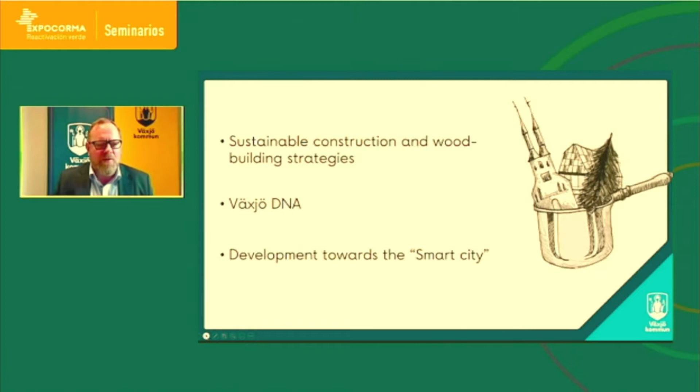So what drove us into the wood building industry and wood building construction? It's been a long process, but first of all, you need to have a market for it. So what we've seen during a long time in Sweden is that we have had a gradual change towards urbanization that led into a shortage of housing units in those areas.

And then we started thinking about how can we change and how can we fill that gap, and started seeing that those producing single family houses using wood would be a good substitute and support for those producing multi-family houses using a wood frame. So we started looking into that kind of gap and void and how to support it.

But as we did that, it became clear that we needed to gain a broader understanding of what that might entail, both from a knowledge perspective and from a market transitional perspective, since there are so many different factors influencing the development phase.

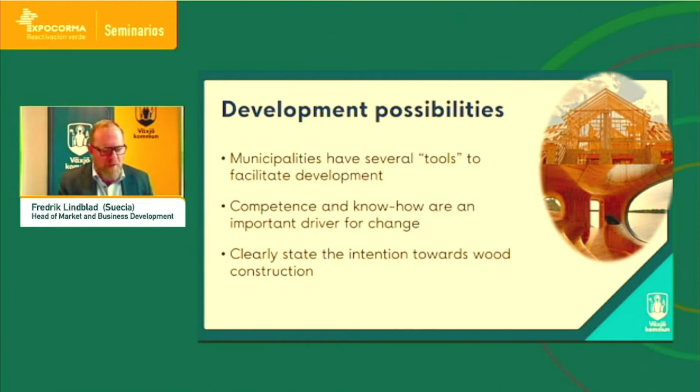So what we have to do here is clearly state our intention towards the industry. And we as Växjö municipality have done that. We started our first construction using wood frame already in '95 in this modern industrial way.

That's been followed by several different strategy documents going forward - in 2005, 2013, and 2018. That has evolved more and more, from a more technical perspective in the earlier days to a more integrated sustainability perspective in the latter version.

2018. And by doing so, we are supporting the industries. We are putting a flag in the ground saying we support wood buildings. That means that companies can start to invest in production technology because they can rely on what we do as a municipality, so they can gain economies of scale in their production process.

That means they can produce cheaper units for us as end users as well, which obviously makes it much more popular for people to live in. So those have been key factors.

And if you look at it from a greater perspective, this has also been highlighted not just by this lovely invitation from you, but also in a special edition in the New York Times during this summer, where they looked at our wood building strategy as a key development factor for wood buildings globally as well.

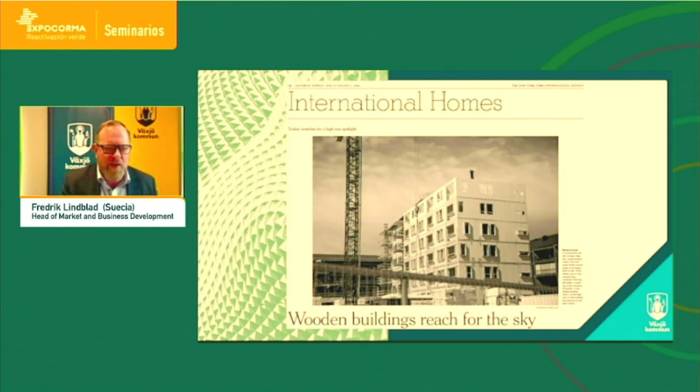Obviously, we haven't been able to do this by ourselves. This is a cooperation among a lot of different parties. And I think that's the key factor - that it needs to be open, as we want to change this from a closed innovation process to an open innovation process, where we can share our success factors as well as our failures in order to eradicate them from the process altogether.

It's also important to focus on other things than just the commercial goal. We need to have clear targets, and we need to have a clear understanding of our responsibilities and how to use the resources in a very cost efficient way.

So this has very much been a collaborative approach already from 1995 up until where we are today. In the previous slide, when I had the three different strategies, we are currently working on a new strategy, which is towards the smarter cities. So we're taking it even further, which I'm going to talk about later in the presentation. Going from traditional stick and stone kind of wood buildings to an integrated strategy, including digitalization and everything else.

As a municipality, we have had a base in our sustainability program as well, because wood buildings are seen as a sustainable construction material. So we took the UN's sustainable development goals that we all know and love, and did a version of our own that fits our part of the world, with 5 different goals and 9 different challenges.

Sorry, that was fast. Yet not everything is sustainability - let's not forget about the importance of the production process and the benefits of using wood in comparison to concrete. It's lightweight, it's easy to distribute using traditional road transport or other formats as well.

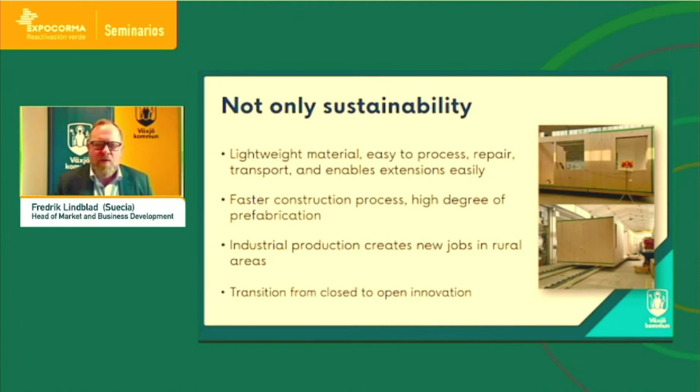It's something that we can develop the production process in a different way and use different methodology than traditional concrete structure and get better solutions, better products. So it's not just about the sustainability and those goals, it's about so many other things as well that is linked together. And what we have done here in Växjö as a key factor is use a lot of our development projects as test beds, both for the industry and for the academia as well.

So we have a full perspective of a building process from planning, procuring, production, and how the residents feel living in it, which has been quite an interesting development as such. What we found as drivers here when we looked at this research is that obviously we need to reduce the environmental impact.

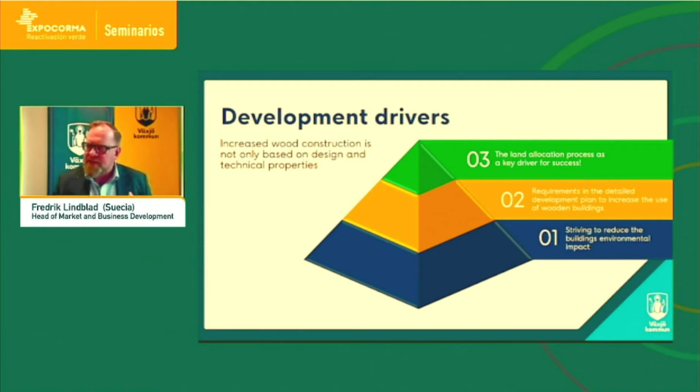We dedicated land in Växjö municipality to be used specifically for wood building, which clearly sends some signals as well. And using the land allocation process, a legislative tool we have in Sweden, we as a municipality can bypass the Public Procurement Act and sell land to developers and contractors specifying what we want them to do, like requiring wood frame technology.

If you remember the graph I showed you earlier, during 2019 we saw a dip on the concrete side and an increase on the wood frame side, up to 20%. So we are starting to see a change in favor of wood building technology and sustainable construction.

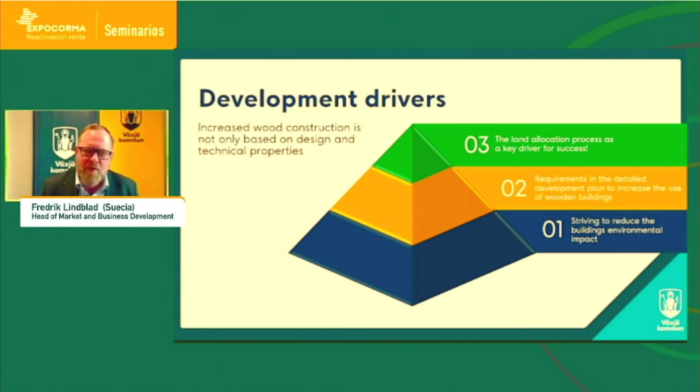I think these are some factors. As I said, it's not just about the technical side, which is easy for architects and everybody else to focus on. It's equally important to look at the strategic, softer market sides. And that's what we're doing now when we're looking forward.

We need to incorporate other factors into our wood building strategy, our sustainable construction strategy, in order to reach there. So it's not just about construction and wood building in itself now, it's about so many other factors that contribute to a sustainable society and a smarter city.

I'm part of a group in Sweden looking at how future cities would look, let's say 2050. We've started this discussion. This is obviously very early, but we are looking at robotization, digitalization, and climate change, which is going to be a big driver for us. How can we handle this? What kind of efforts do we need to meet these challenges?

For us to construct and plan our cities, but also for our inhabitants to have a life that is sustainable for the long term as well, these are some of the factors we talked about.

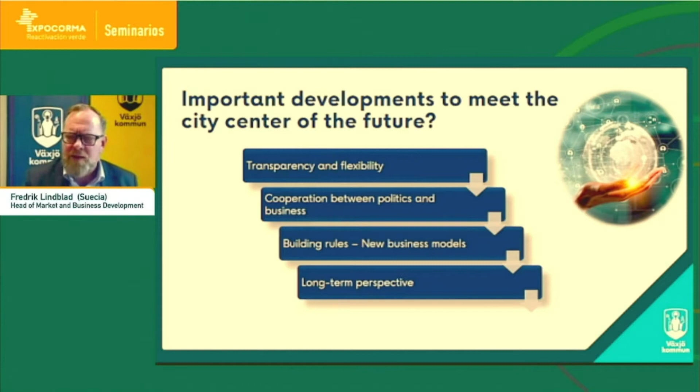Our next test bed, in comparison to what I discussed before, is called Crossways, which is our new smart city concept. It's a big area of our city trying to incorporate new solutions, looking at sustainable energy as part of it—how we can use methods to create sustainable energy and save energy locally using batteries, for example.

Or how can we change the healthcare system in a sustainable way? And more importantly, how can circularity and circular models support the development of cities, from everything from reuse of products to complete new developments?

That's the big challenge for us going forward, because this is not a complete straightforward process, as it includes a lot of different companies, not just in the building industry and building process, but elsewhere. How can we connect the city with smart ecosystems?

That means how can the inhabitants live in this sustainable city, sharing information and having information access at their fingertips, making their life easy and easier to live in a sustainable way as well. It all links together in the sustainability goals.

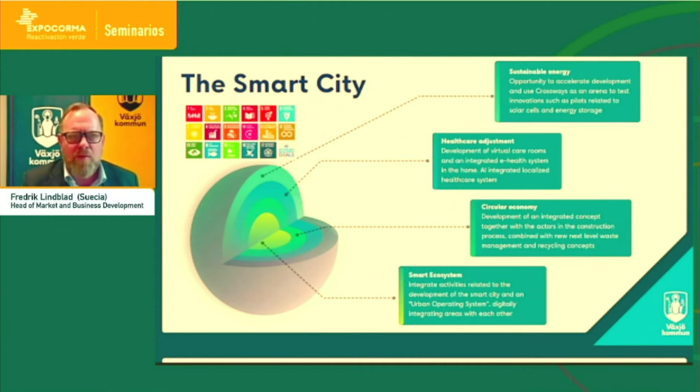So it is much more complex than just figuring out solutions to build higher or something else. We need to think in a different way, which has proven to be very, very complex. But there is a road to this transformation, and we need to look at this transformation.

We need to change from the throwaway economy and look at the business process in a different way. First, using a very sustainable material in our construction process, but also optimizing the use of materials going into the process and for the remaining life of the building and the inhabitants in the area. That in itself will give us a lot of job opportunities and solutions.

But to tie it back to where we were, linking these three strategies to circularity, energy, digitalization, and smart cities, we have to combine that with the circular approach, both from the user perspective and the producer perspective. As I mentioned in the previous slide, this is where it becomes really, really difficult. You need to fence this off so you don't tackle everything at once, because that's very hard. Figure out different ways to make gradual change, and predominantly collaborate with other entities in your country, as we do, but also internationally, to share information and build a sustainable city of the future.

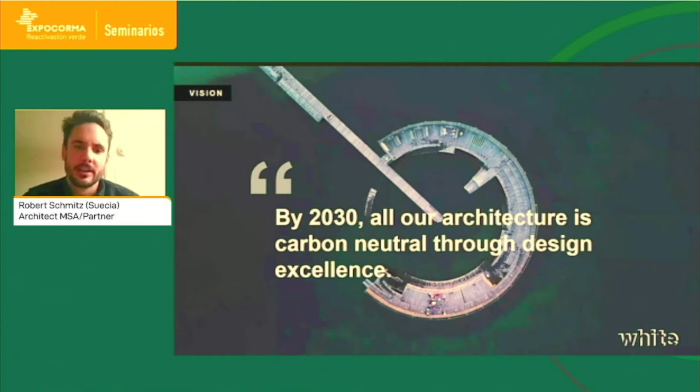What you see here is that in Sweden, we emit about 10 times more greenhouse gases than we can afford to, and the building sector is a great part of that emissions, 21%. So I think it's really important that we change our mindset and really advocate for sustainable ways of building. And of course, one of those methods is using timber in the process.

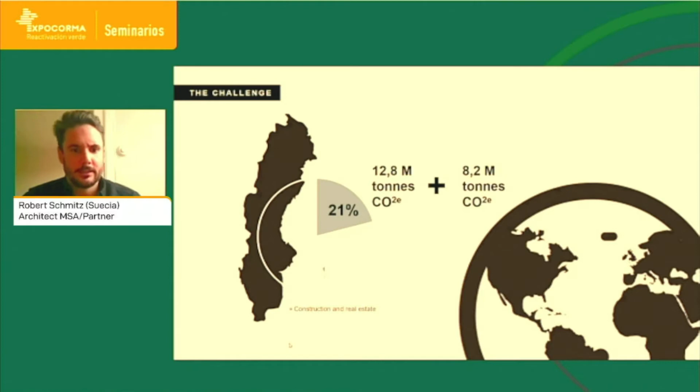Being self-employed and owning our own company, we have the power to reinvest our profit back into project-based research. In 2019, we invested 3 million euros back into this, to help us become better in a sustainable approach for our projects. We channel this money through White Research Lab.

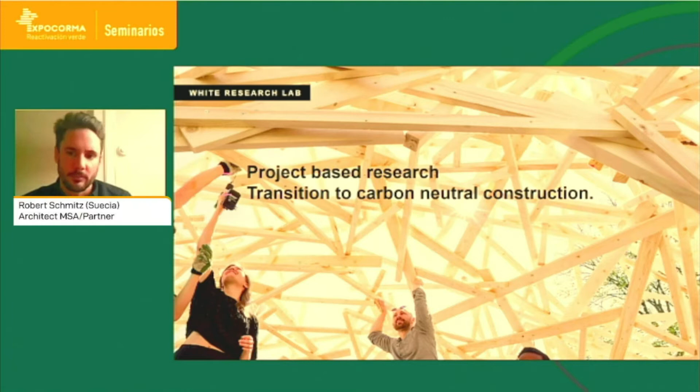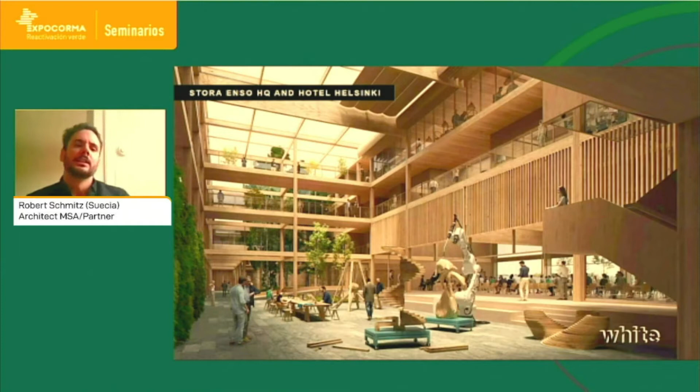One of these research labs is focused on timber. And one way of implementing this is through competitions. I'm also head of competitions for the Stockholm office, so here we really try to learn the characteristics of timber.

This is our proposal for Stora Enso headquarters in Helsinki, where we won an honorable mention. Here the focus was really about learning how LVL beams work to achieve flexible spaces.

Another open competition we won is a quarter in Riga, Latvia. This is an interface between an old brewery and a new establishment in timber, creating a culture atmosphere while doing it. We've been quite successful in this project.

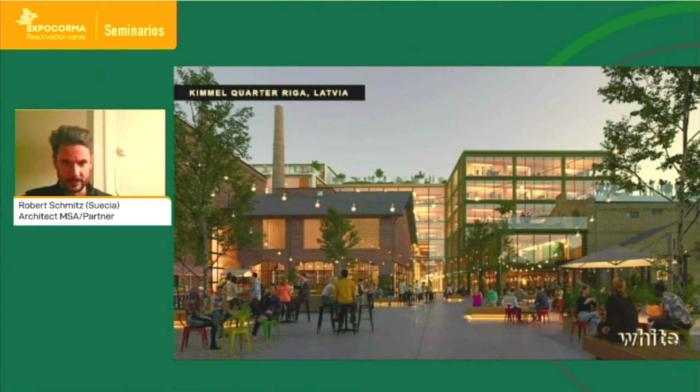But back to Sweden again, I want to show you an early example of this: the tallest timber structure in Sweden, pre-Sara Culture Center. It's a church, built in 1912, 34 meters high.

This church has actually been moved quite recently, and that's really an example of how sustainable timber can be - if it doesn't fit where it is any longer for any reasons, you can move it or disassemble it and do something else with it.

This became an inspiration for our project when we worked on the Sara Culture Center. The city of Skellefteå is in the north of Sweden, just below the Arctic Circle, with a subarctic climate - long, harsh winters but fairly nice summers.

They have a long tradition with timber. The city is where it is because of the abundance of forests surrounding it, but also the mining industry. It has developed quite an advanced timber industry, I'd say almost a leading industry.

They also have academia focusing on timber technology as a branch of the University of Luleå, another city close by. They've applied this timber strategy as part of the wood cities initiative, which allows them to investigate whether it's possible to do projects in timber before they start to develop.

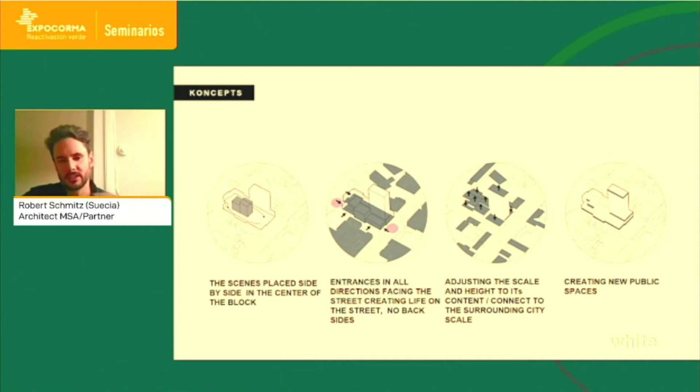With a number of strategies, we worked this out to create new public indoor spaces and a new landmark for Skellefteå, but at an entirely new scale. Here the timber became crucial, because the material is something the people of Skellefteå could relate to, so they didn't feel it was becoming too big.

Here's an image of the high-rise framing the main square, and you can see the construction timber in the facade, underneath the facade, going all the way up to the top.

The program is 17,000 square meters of culture center and 13,000 square meters of hotel and conference space, with a lot of stages for performing arts, an art gallery, a library, and back-of-house production in the low rise, with the hotel and conference center in the high rise.

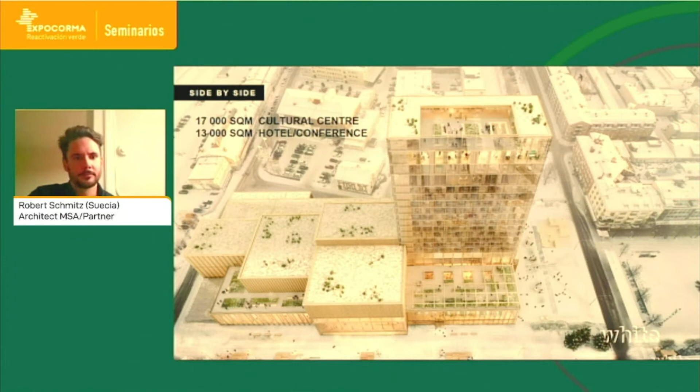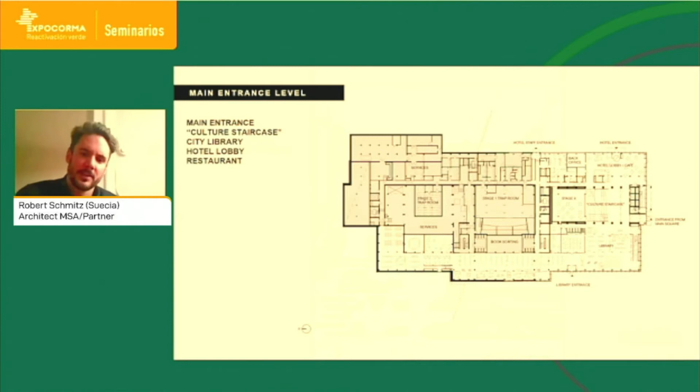It's a split level, you could call it, so it has 2 entrance levels. The first one is facing the main square, and here we have the library and the hotel lobby, with a café behind. And here we also have a giant culture staircase connecting these 2 storeys.

From here you can go to all the different operations within the building. This was not planned in the competition, it's something we contributed, because we wanted the people of Skellefteå to have a place to go and meet and interact without having to pay for it. So it would be a new meeting point in Skellefteå.

All the focus was on making this in as much exposed timber as possible, and for the texture of it.

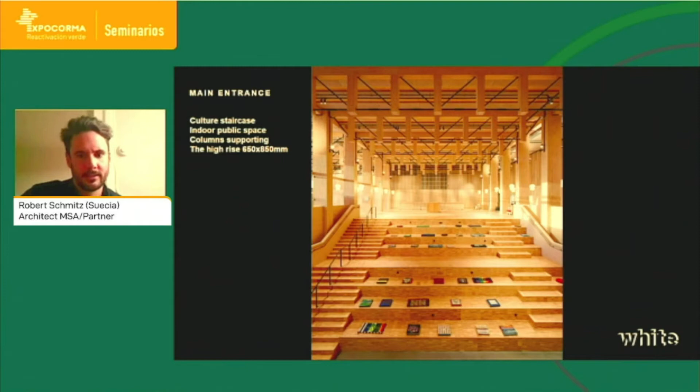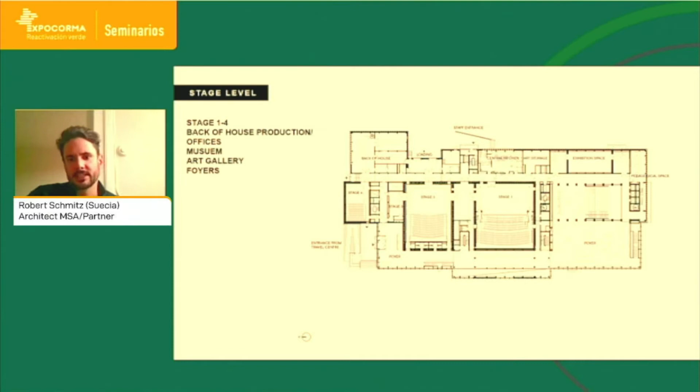On the second level, we have a great foyer running all the way throughout the building, connecting all the different stage and exhibition spaces, placed in the center. We have worked with flexibility, we didn't want to name any of the rooms or hallways, because we wanted people to adapt them and use them in many different ways.

We have also worked with a lot of stairs connecting the library with the theater foyers, so that the different operations can work side by side at the same time, or work together, more importantly, and make new connections and collaborations within the building.

Throughout the design process, we worked a lot with renderings and vision images, so we could really explain to the builders and stakeholders what we were talking about and how we wanted the building to express itself. This is a vision image from very early in the design process, and this is the end result, the day before the inauguration. As you can see, we've managed to keep it quite the same as we intended.

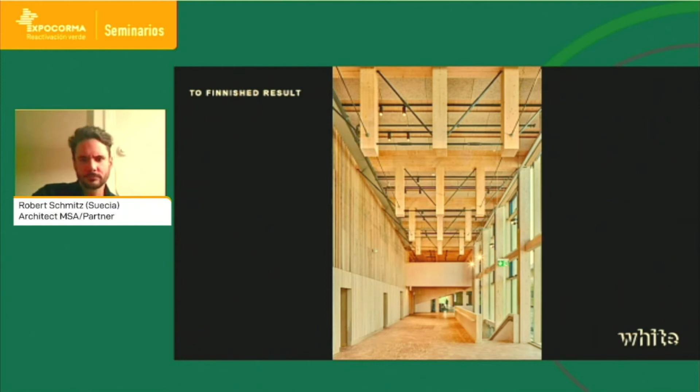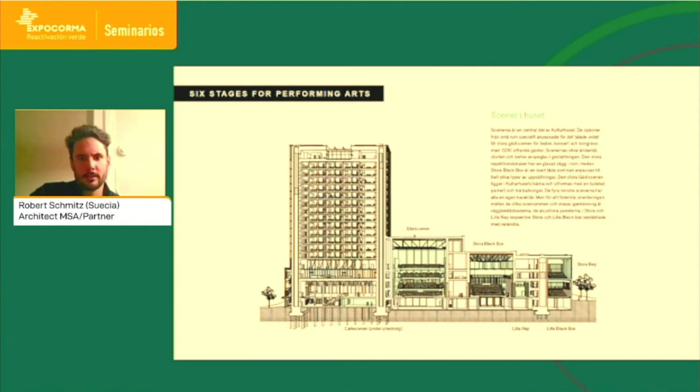If you're standing in the orchestra pit below me, up to the ceiling it's 30 meters. So it's quite a big room, every space that we have created.

The hotel is leveled up in the riser above the grand staircase and the main entrance hall. It has 205 hotel rooms, a conference center, gym, rooftop spa, 3 restaurants, etc.

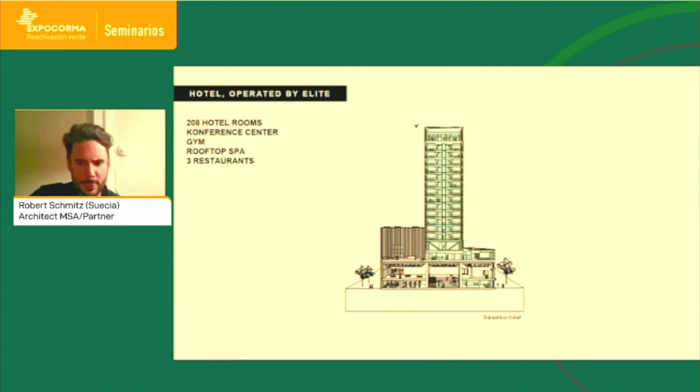It works as a solitaire, and contains on each level 18 pre-manufactured hotel modules, stacked on top of each other and stabilized between 2 cores on each end. The core and the shafts are also made in CLT. So everything you see here is cross-laminated timber slabs or glulam pillars.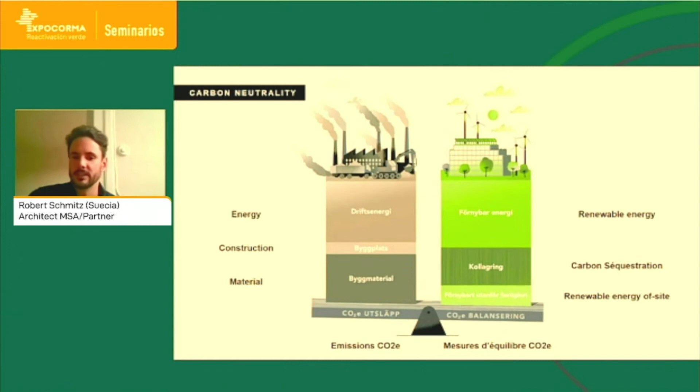Carbon neutrality - the building industry has a lot of emissions, carbon dioxide equivalents, so we need a footprint but also a handprint. To challenge that, we need renewable energy and carbon sequestration, which is what timber does for you, and also work with other renewable energy offsite, for example wind power or PVs. Our calculation says our building has become a climate positive building - during its life cycle it binds twice as much carbon as it produces or emits while producing, transporting and building it. It's a fantastic result.

This building has a lot of different functions, and it became a library of solutions. For example, we have 27 different types of outer walls, and the entire building is made of timber. We have a concrete foundation and basement, but the shafts, stabilizing walls, and all the vertical load bearing objects are in timber. We needed to put some concrete on the top levels in order to prevent the building from swaying too much, to prevent seasickness - it's not for stabilization, it's more for the swayness that we needed to do that.

Here you can also see the 13 stories of pre-manufactured 3D modules on top of each other, which is some kind of record as well.

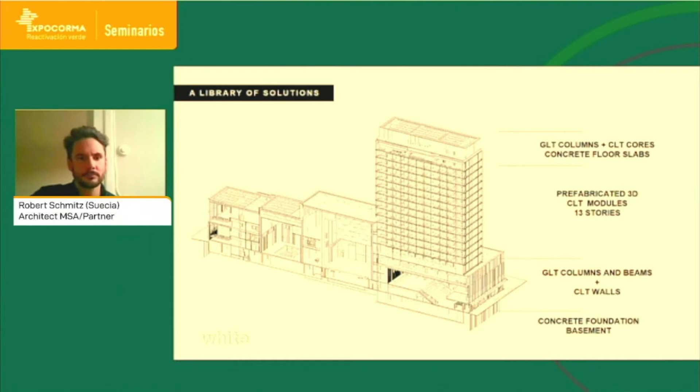This enabled us to do a very fast construction. It took 73 weeks of montage for the timber structure. It was built up in 13 different segments, because we didn't use any weather protection, so we needed to have protected roofs quite quickly. Timber enables really large elements - the largest one was 27 meters by 3 meters and weighed 12 tons. With one crane we could build this, and it was around this stage 1. The only thing is when you have these big elements, they're a little bit wind sensitive, so we needed to have the weather with us while constructing this building.

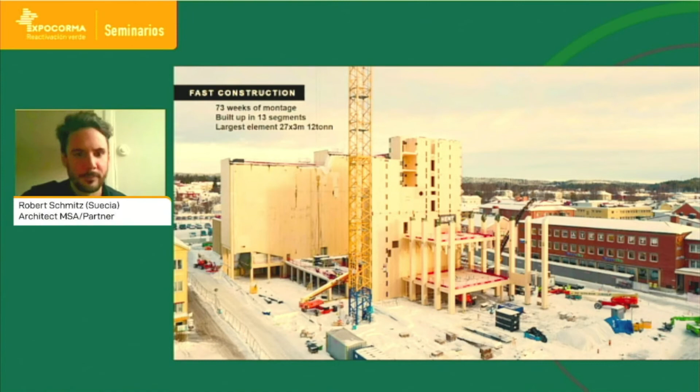Here is the first hotel module, and this was pre-manufactured in a factory just 40 kilometers outside the plot, outside of Skellefteå, using locally produced spruce from the region. This was made in a safe environment so that all the stakeholders and builders could see and learn from this first edition how to apply it to the building. This is actually also in the building, so that's quite fun.

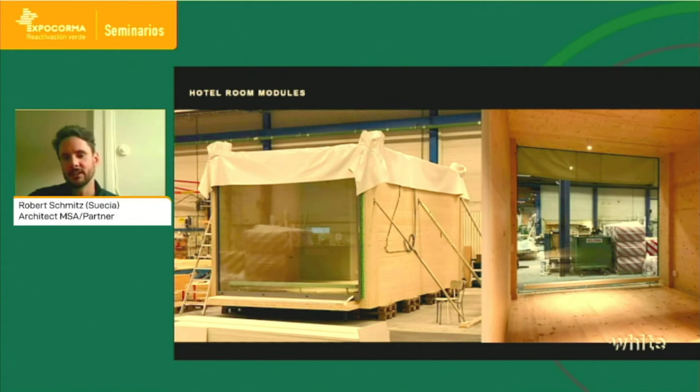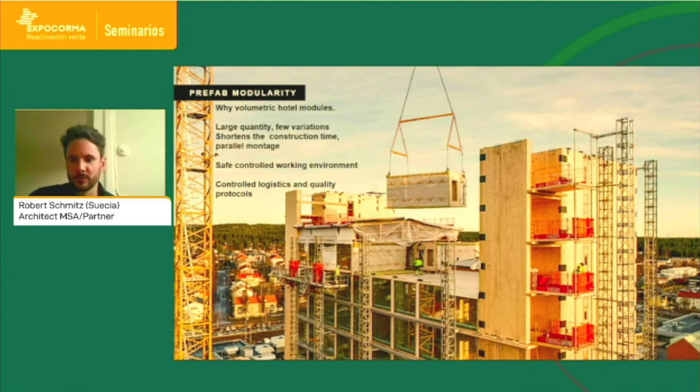So why volumetric hotel modules? Because there are over 200 of the same units, so we have a large quantity and few variations. It shortens construction time - you could do parallel montage while constructing on site, working at the same time in the factory with the hotel modules. You work in a safe, controlled working environment, with controlled logistics and quality protocols. On the production side, there haven't been any complaints from neighbors - it's been a really quiet working place, and we saved about a year of construction time in total compared to if we'd done this in concrete, for example. That was a huge part of money saving for us.

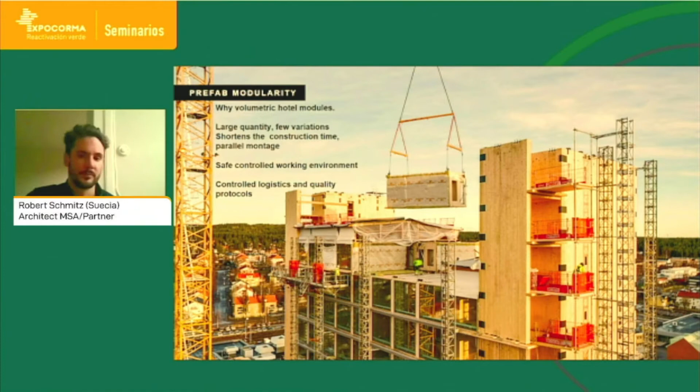The building envelope - the low rise has a wooden frame building, but the outer walls are made from CLT. In the high rise, we have a double skin facade which is ventilated and works as a warmth pillow in the winter and reduces heat in the summer, and in between we have sunscreen.

Fire requirements - the building is fully sprinklered. The hotel tower has TR1 and TR2 evacuation stairs leading directly out into the open. The building is rated using the Swedish BR0 system. For the culture center, or the low part, you need to get out of the building in 60 minutes, and for the hotel part you have R90, so you have to be outside the building in less than 90 minutes in case of fire.

So building in this new way and having this new mindset of how to build and rethink construction has really empowered everyone in this process. We have questioned methods of working, since this is a test bed building really, and we needed to understand the characteristics of timber so that we can optimize it in each detail.

The local power company and a company called ABB have also worked together and created innovation in the energy system. So this is not just a building that is optimizing itself, it's connected to the entire city grid with electricity and also heat and cooling, helping them to be as efficient as possible.

It has the highest certification in the Swedish Green Council. And also, instead of diesel engines for backup, we work with batteries, from the local battery company that has been established while this building has been in development.

This project is now one of 17 projects showing as showcases at the conference at COP 26, inspiring sustainable buildings and a sustainable future. And I hope I could have inspired you a little bit as well. Thank you.

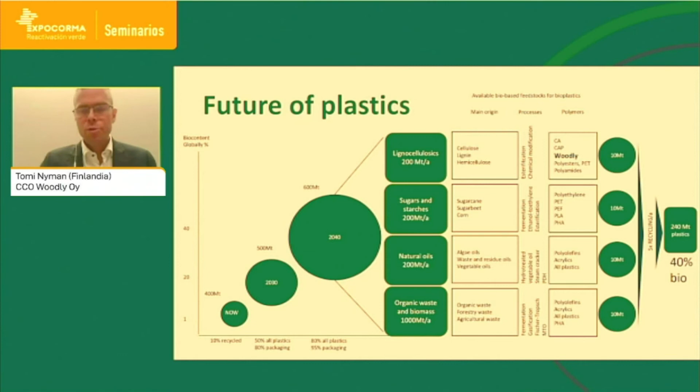If we produce 40 million tons of bio-based polymers and make sure they are recycled 5 times every year, they turn into 240 million tons of plastics, which suddenly becomes 40% bio content in all the 400 million tons of plastics produced year to date on an annual basis. So this is how we see a combination of recycling and using bio-based feedstock for plastics production as the future.

How do we then ensure that there is enough raw material? First of all, we have to use only sustainably managed forest raw materials. We can utilize different waste and residues.

In the previous presentations, there was construction work, and there is always sawdust and other pieces of wood coming from construction work that could be utilized in our processes to produce plastics. There are other sources for cellulosic feedstocks, and we have to maintain biodiversity and continue reforesting and stop deforestation to make sure there is enough forest available for all the applications.

Then we move into the production. We stop essentially the fossil feedstock coming into the production of plastics. We use the materials efficiently and multiple times.

We are introducing a take-back and buyback scheme for our material, so that if there is a product made from Woodly which is no longer wanted in the market—an old packaging, an old product—we are willing to take that back to make sure it is recycled.

Then from conventional sources and from consumers, the plastics are collected and sorted as part of the waste, and via recycling they can be utilized again to make new plastics products. Minimizing losses in the closed system is an essential part of this cycle.

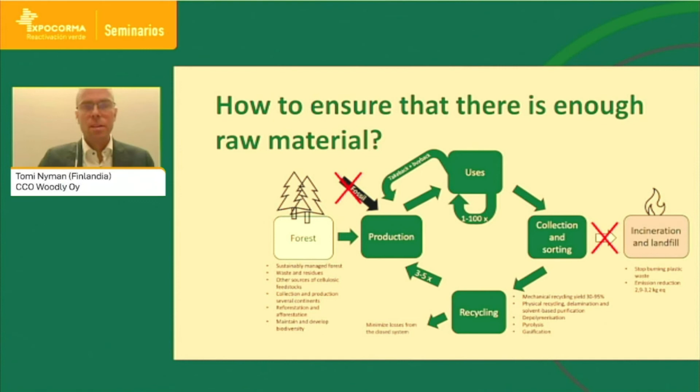And one thing, of course—since we are producing a valuable biomaterial, we want to stop the incineration and landfilling of all plastics. It doesn't make sense to burn valuable materials or to landfill them, as we could continue using and recycling them. These are the only ways to ensure there is enough material for all the products and packaging we need as we move from fossils to bio-based materials like wood-based materials.

Then I will be showing some case examples made from Woodly. Last year, at the beginning of the year, we launched a flower packaging film, a conical bag made from Woodly for the largest retail chain in Finland, Kesko, which is among the global 100 most sustainable grocery trade companies in the world.

We also launched a packaging for herbs and salads with a brand called Vihreä Keiju here in Finland. In these kinds of thin films, we have been replacing low density, linear low density, high density polyethylene, polypropylene, oriented polypropylene, and PET in various applications.

We have launched sausage packaging made with Woodly with HKScan. We have launched textile packaging for retail and e-commerce with a company called Black Moda. They can be produced with or without a hanger, where the hanger is also made from Woodly.

We have piloted thermoformed packaging for fishing lures made from Woodly, replacing PET.

We have made 3D printed electronics utilizing Woodly. Here is a headset, an electronics headset. We have injection molded boxes for kitchenware applications, replacing styrene acrylonitrile and polypropylene.

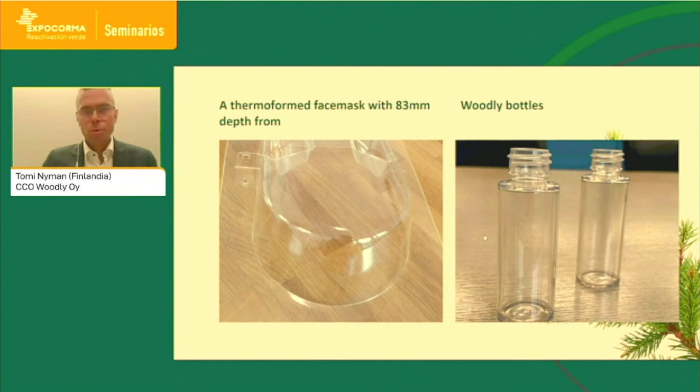And here we have injection molded jars and cups, dishwasher safe and reusable, replacing, for example, PET single-use drinking cups, and cosmetic packaging with hinges and closures for makeup.

Excuse me. So these were some examples of injection molded products. Then we come back to some film applications and extrusion coated applications.

For beverage companies, we have produced with UPM Raflatac a laminate adhesive, for example for beer or for jams. And we have also been working with another company called Amerplast on wraparound labels for water bottles.

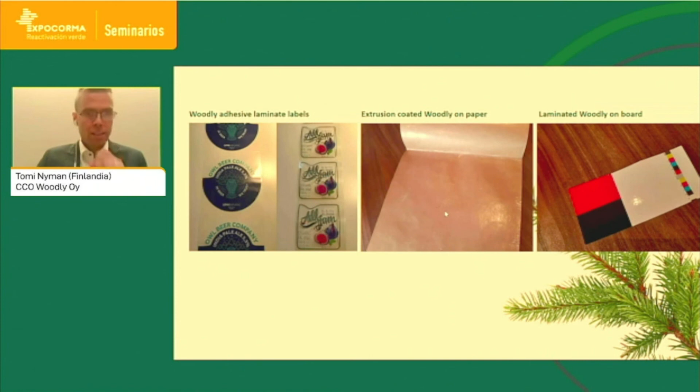With extrusion coating onto paper, Woodly works exceptionally well also, and it can be laminated onto paperboard, both high gloss or matte packagings. This is actually an electronics packaging made from board.

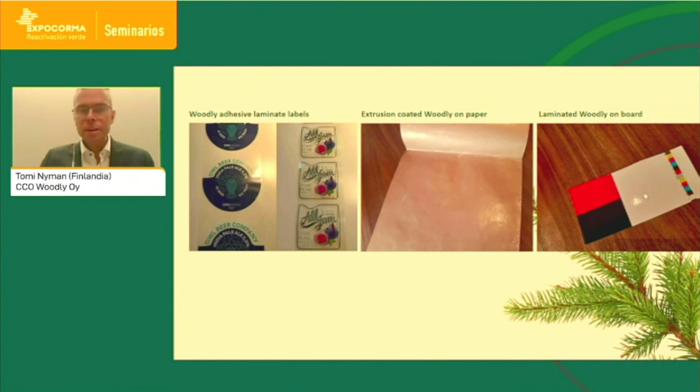So that was a quick run through about Woodly. You can have my contact details, and happy to answer any questions you may have.